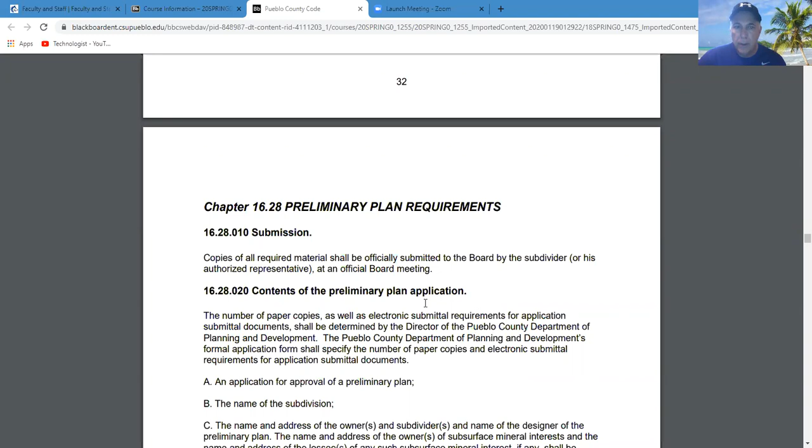So let me start there. Let me share the screen with you here, and I'll bring up the regulations. As you can see here, this is the preliminary plan regulations, and I was on page 33. Actually, we had talked about some of these, and now again, remember what we're looking at here are the requirements for the submittal, platting, and drawing of the subdivision that would be given to the municipal agency to allow this to happen.

As I mentioned, the preliminary documents really are the engineering documents. These are all the documents that are required. What's sort of unique about these is these will go to the Planning Commission, any sort of engineering, whoever the leader is of the engineering department or designee of that, whether it's the city planner or whether it might be underneath the public works director, whatever that might be. And then the engineer would work under them, or the engineer may have their own office.

But this is not the only time, but the main time when the engineer can discuss with the design engineer and the client and the developer what is expected for this subdivision. Now, this particular information is housed inside the engineering office and becomes public record, but it's public record in that area, not to the buyer. The conveyance information and everything will come in the next piece of information, which is what's called the final plat.

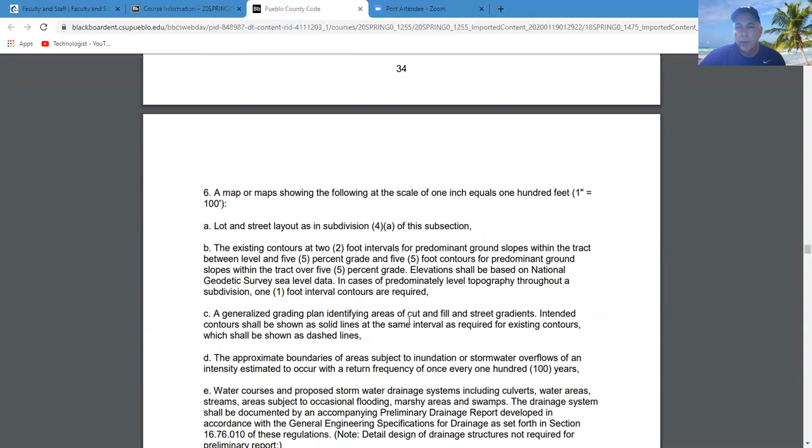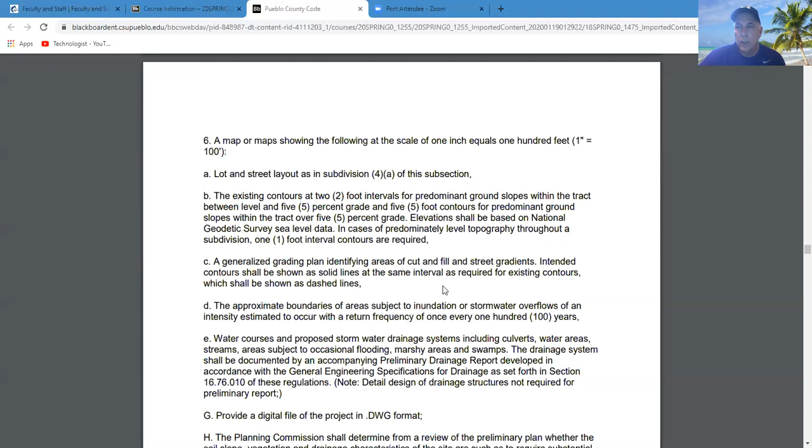Item 6 here talks about things on the map such as a lot, street layout, subdivision, but then they want to show how the existing contours will be affected by those lots and streets. So they're looking for 2-foot minimal intervals for your contours. You notice that in our subdivision we had 2-foot interval contours, so we can actually look and plan our properties. You also have to have a generalized grading plan. Areas, and like if there's going to be any cut and fill, and what the finished elevation is going to look like, or the finished contours. This must be done at this particular area.

Also have to indicate any sort of the stormwater management. Have you investigated the potential 100-year storm situation? This is where your civil engineer would definitely come involved. They'd be looking at what is the 100-year flood criteria in there and what it looks like, and have you investigated, and have you done a model and actually modeled for capacity in all those considerations.

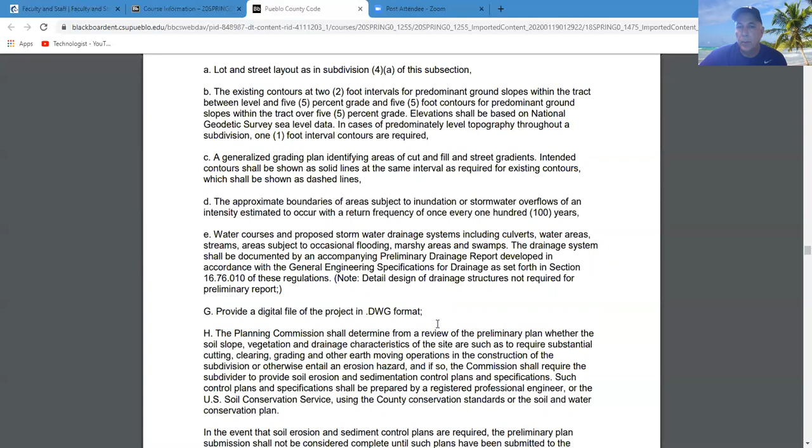They want to look at the soil and vegetation types of things, and if you're going to take off a whole bunch of soil or topsoil, is that going to impact the downstream people and considerations to be done there? So they want to look at all of those things and how you're handling it.

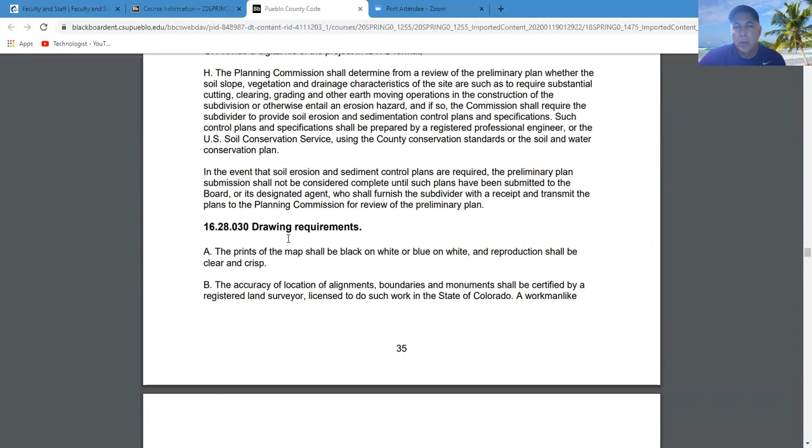16.28.030 here, it talks about drawing requirements, and here is where the municipal agency can get really picky on this and say that they want it to be done, it has to be done with quality, and it has to be a professional document. And this is where they're regulating it.

One may say, well, why do they have so many rights in here when this really isn't even their property? Well, remember, once this is dedicated and turned over to the city or county or whatever municipal agency, they become the owners of the roadways, they become the owners of all the additional lands. So they're going to make sure that they meet their minimum criteria so that they can maintain them and take care of them. Plus, it's their duty to protect the citizens who will be using this area and actually be impacted by this area, either as an owner or next door to it.

Here are some of the requirements. You'll notice that it has to be done by a professional surveyor. It needs to be licensed people doing the work. And so just the average developer who doesn't want to spend money on the engineering and professional costs cannot get away with that. They do need a professional to do this.

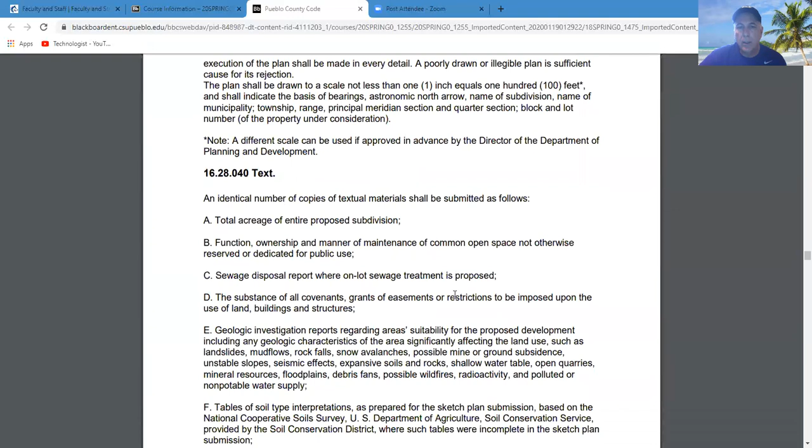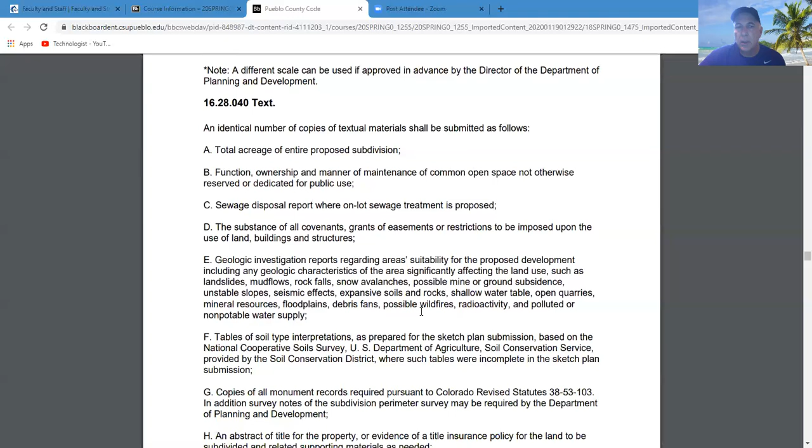Text, they need the identical number. So in text, there should be however many copies are required for submittal, what the copy should look like. And then in that text, there should be the total acreage, the function of the ownership, any of your sewage disposal. Here you should have anything like your substance of all your covenants, grants, easements, restrictions, geological investigations, tables of soils, any monuments, monument records.

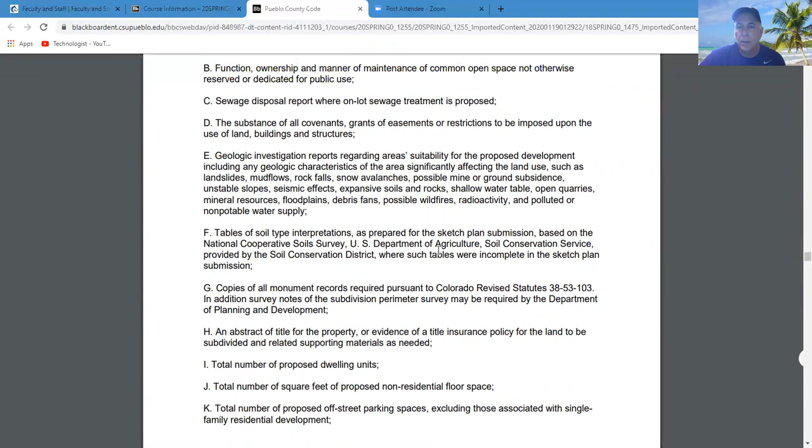These all have to be done in compliance with Colorado Revised Statutes. Remember, we had an opportunity to look at Colorado Revised Statutes when we talked about 38-53-103, where we actually did our platting of our land survey. That is item G of this up here. We would have to do a land survey on this particular one, also on the outer boundary on that.

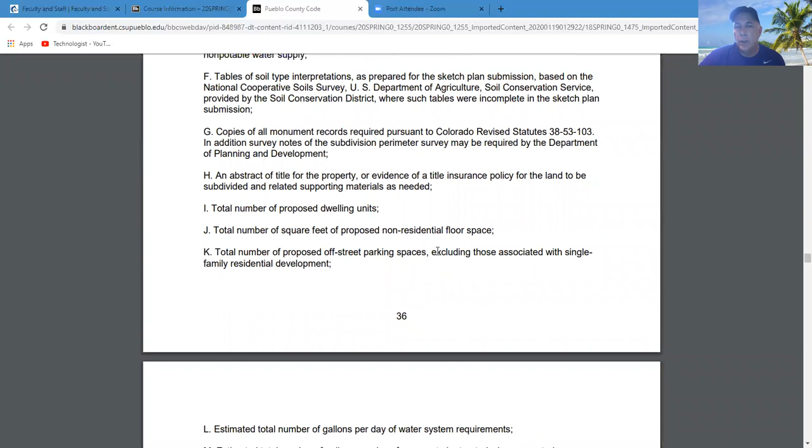Total number of proposed dwelling units, total numbers of square footage, and how you're going to use floor space and how it would be impacted here. Parking, any parking that would be on here. And then they're asking for an estimated use of water in gallons per day.

Now, one may say, how would you do this? Well, you'd have to predict, based upon if your development was actually sold out in that capacity, what, for example, a single family would use in an average day of water, and then you multiply that by the number of users, and you could get a fair estimate so that the city could know what sort of impact it's going to have on their system. We do the same thing for sewage.

Now, in this particular situation, they're also looking at how would you do sewage? Is sewage going to be into a communal system, for example, a sewage treatment system where the infrastructure's there, we'll connect onto it and pipe it away? Or is it done in individual sewage disposal systems? Individual sewage disposal systems are going to require a certain minimum size of a lot. In our area, our 2-acre lots are plenty sufficient for that.

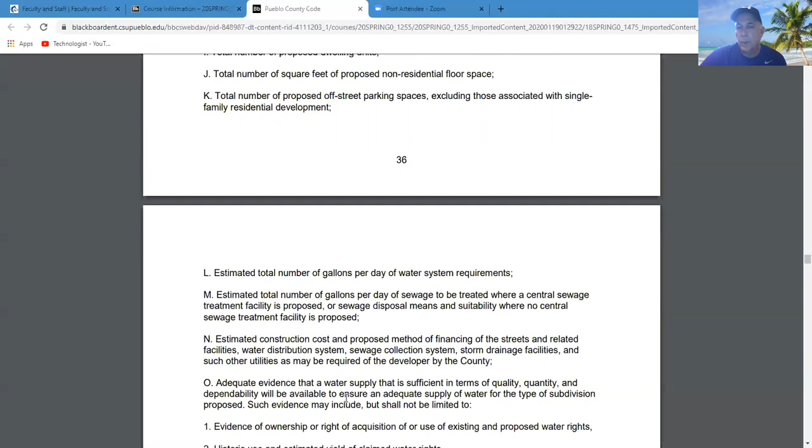As a matter of fact, that's the reason many developers will use larger lots, because they could get away with individual sewage disposal systems. County governments do look hard at that and decide whether or not they want them. Many county governments don't want that. There's things such as they have to have leach fields and tank systems on individual sewage systems. So that's a reason for the larger lots. Plus, the soil types have to be adequate to handle those sort of situations. So the city government would need to know that that's been investigated.

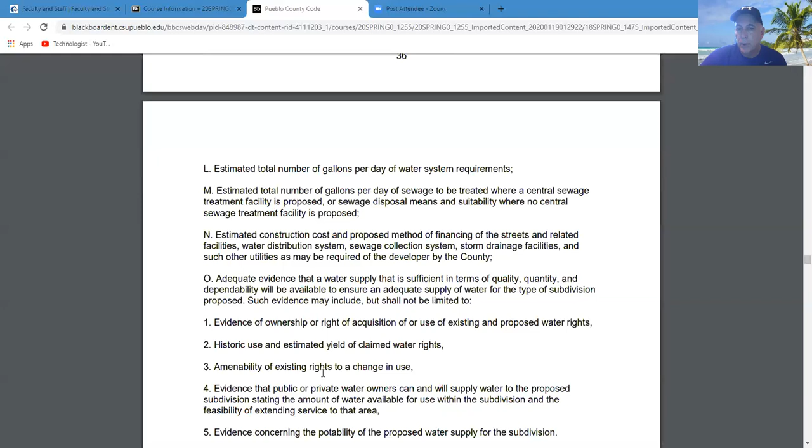They also would be looking at, let's say, any other water supply things like water rights, claims against the property, so things such as the ditches and irrigation practices. Our particular subdivision that we're working on has a little drainage ditch that runs across that property. If you notice, it starts at the beginning and ends as it passes through. So it's most likely an irrigation system that runs all the way through the property and is actually part of the property. So it does have to be maintained, and it probably does have some legal rights, and it would require some sort of easement to take care of it.

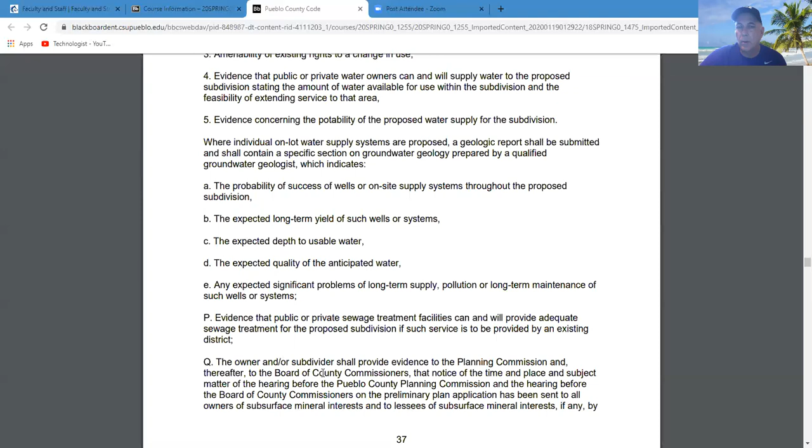Evidence of any potable water that might be used, wells and things of that nature. And also any unusable water, if it is on the property, how's it handled, and is it taken into consideration? P would be any public and private sewage treatment facilities that are either on there or going to be on there. That deals with the one earlier.

And let's see. The last thing is that the commission sort of has the right to make a decision, regulate this, and actually go back and have them look at other information should they need it. They want to make sure that all of the legal boxes, shall we say, are checked. The commission really does have a lot of power in this process, so it is encouraged that you learn to work with them. That being said, we have just talked about the preliminary plan requirements.

Like I said, this is one that's very important for the civil engineer. And later on, I will be sharing with you some examples of this. For now, we are going to finish up on this section. The last section we'll be talking about in our class, in the county subdivision regulations, would be the information about the final plat. And actually, we'll talk a little bit about some of the detailed drawings that may be a part of the subdivision process.